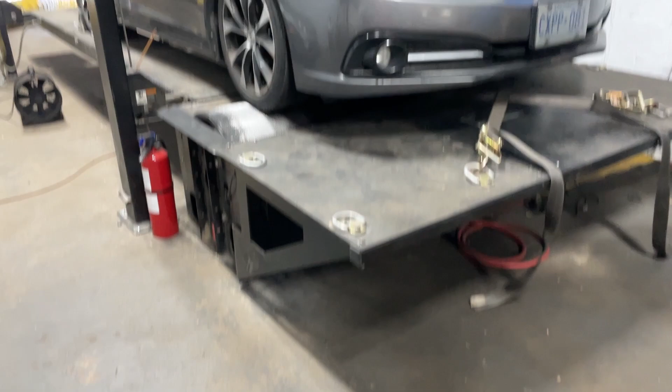Aiden brought his 2013 Civic Si in for a tune today. It made some great power. It actually has a very special engine setup and I'm excited to make a video and share it with you guys. So like I said, 2013 Civic Si, so this is a 9th gen Civic Si.

I see a lot of these cars and I really like these cars. This one is kind of a sleeper. It doesn't have anything too flashy. It looks pretty stock. It's lowered a bit. It has a pretty cool wing on the back. Carbon fiber by Kev. Never seen this one before. It's a really nice piece.

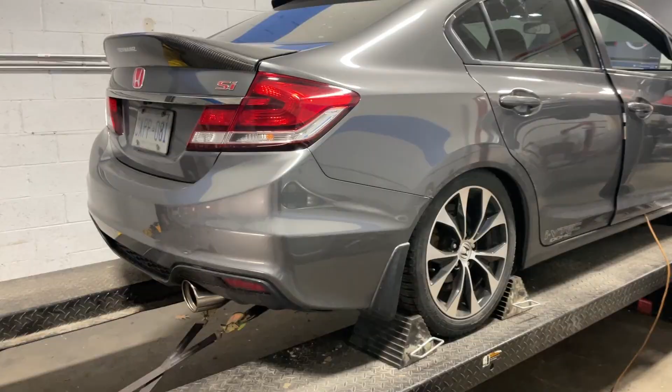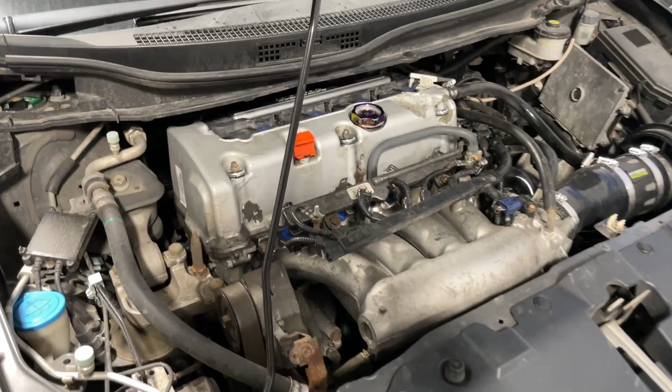Pretty stock looking Civic Si, but what's under the hood is pretty special. So why don't I show you what's under there? So this 9th gen has the engine that everyone wants. It is the original K24Z7 block, but the owner has swapped on a K20Z3 head. So this is the older style K20 head with 4 exhaust ports.

If you know these 9th gen engines, the K24Z7, it has one single exhaust port. It is an integrated exhaust manifold, so it just has a downpipe sticking right out the head. The head that's swapped onto this engine is the old style. It has 4 ports. It's running a conventional style header. It's running OEM 8th gen Civic Si cams, and this setup worked really well today.

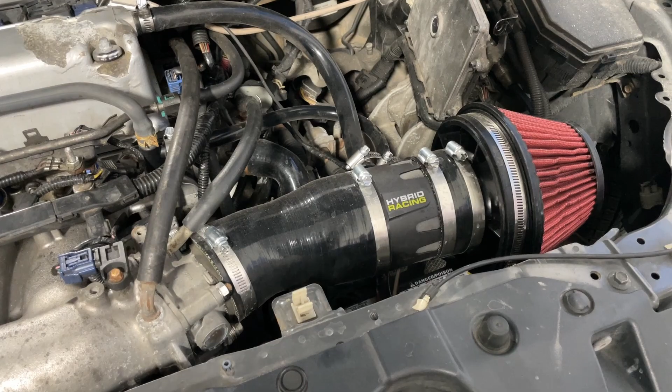Let me just go through the bolt-ons and we'll go into some more details of the engine, and then I'll cut to some shots of the dyno pulls. So, starting with the intake. This was a problem today. This is a 3.5-inch hybrid cold air intake, but it's not in its cold air configuration, and it's sucking in nothing but hot air today. Intake temps were up in the 150s in this configuration.

We ended up making some heat shields to do some testing, to fine-tune the setup. The owner is going to actually make his own heat shields that are more permanent, so he can run it like that and not see the ridiculous intake air temps that this was seeing, or he's going to convert it back to the proper cold air intake setup.

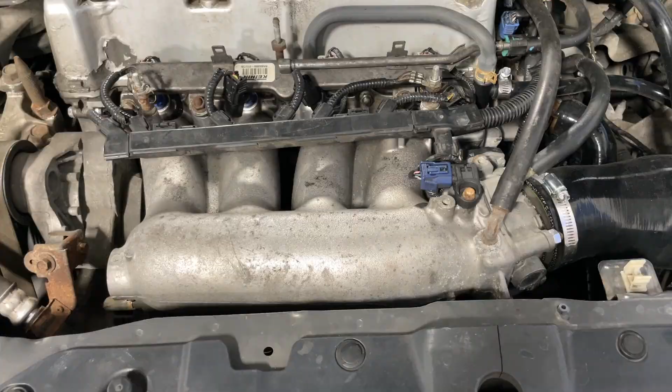It does have a stock 8th gen throttle body, so this is the 60 mil throttle body. It's running a stock unported RBC intake manifold. It's running RDX injectors. The head, like I said, K20Z3 8th gen Civic Si head with the 8th gen Civic Si cams. A mechanic did this for the owner. We believe it is running the 8th gen Civic Si cam gear, the 50-degree VTC cam gear. I'll try to confirm that and put it in the comments if we can figure it out.

The only other addition to this engine is the oil pump. It has been upgraded to the RSX Type S oil pump to help it rev out a little bit better and free up a little bit of extra horsepower. The header was a tough one apparently. It is running a PLM header that's meant for an 8th gen Civic Si with the K24 swap, but it still didn't fit. It hit the steering rack, so it had to be modified a bunch, banged, clearanced and whatnot.

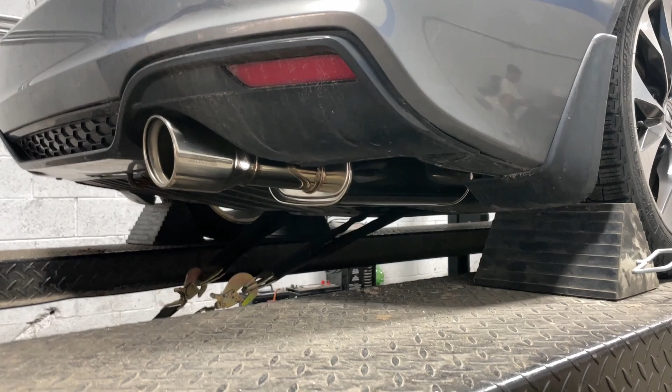Exhaust system, this is running the Invidia Q300. It is a very nice quiet exhaust by comparison to a lot of the other 3 inches. I think it's only 2 3/4 inch. So it is a limiting factor, but it didn't really limit it today. So that's pretty much it for the mods and the engine. The only other thing of note is we did tune it on pump 91 octane gas today. It is tuned on Hondata FlashPro. So I think we've covered everything there. Why don't we cut to some shots of the dyno pulls, and then I will share the final results for today.

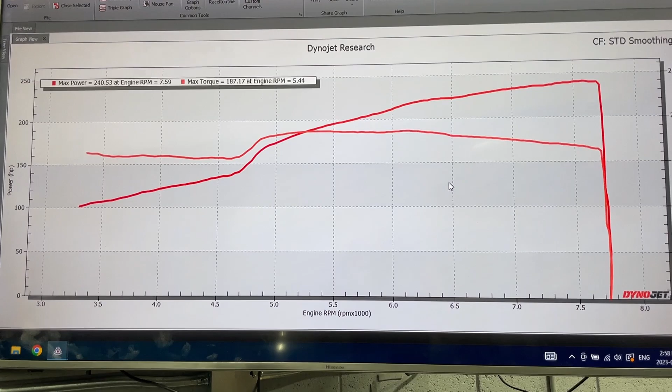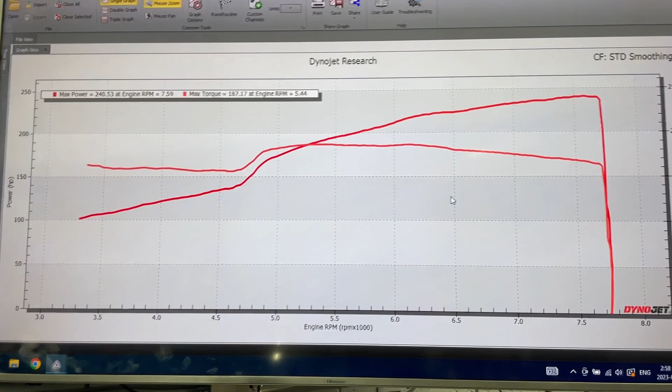All right guys, hopefully you enjoyed those dyno pulls, but I'm sure you really want to know what this thing made today. And up on the screen, I have the final results. Today, with pump 91 octane gas, it made 240 wheel horsepower, 187 foot-pounds of torque. And for a 9th gen, these are amazing results. Normally, a full bolt-on stock 9th gen engine will make around 210 wheel horsepower, plus or minus a bit, and about 175, 180 foot-pounds torque.

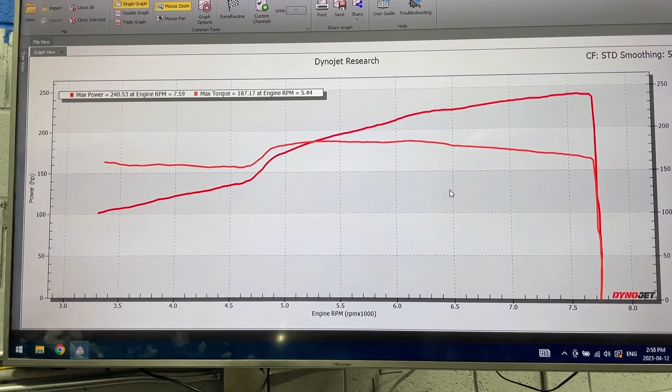But the 240 horsepower that this thing put down today is fantastic. We did raise the redline because it has a good oil pump in it. So its redline today is 7,800. It started to plateau there and we didn't need to really rev it any further than that because it wasn't making any more power. VTEC is set at 4,700.

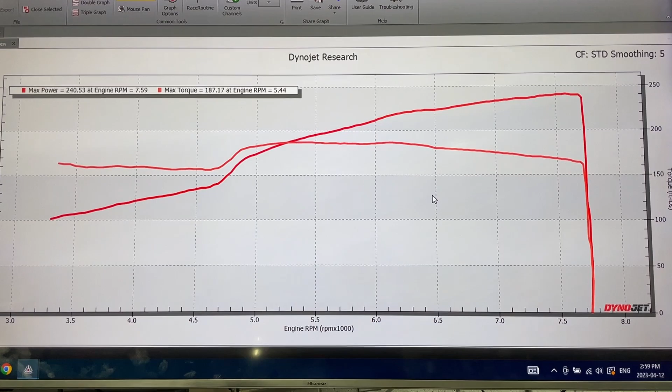I know you guys like to know what VTC is set at. So down low, it's 25 degrees. Through VTEC, it is 40 degrees, and then around 55, I start tapering it down to 25 degrees at redline. And that gave it the best results and kept the torque as flat as possible. This is a fantastic upgrade in my opinion for a 9th gen. If you want some serious power out of your 9th gen and you're willing to go to the trouble of doing a head swap, the 8th gen Civic Si, basically a stock Civic Si head, is a good upgrade.

It is a ton of work to put it in though. You can't just bolt it up. There are some passages that don't line up, so you have to weld those, fill them in with weld, then remachine this head flat. You do have to change over the cam position sensor wheels from the original K24Z7 head. But once you've done that and gone to all that work, you can expect some pretty good numbers. I know this owner is super happy with these results. I'm sure he's gonna really enjoy this setup. And I think he has some plans for possible other upgrades for this setup.

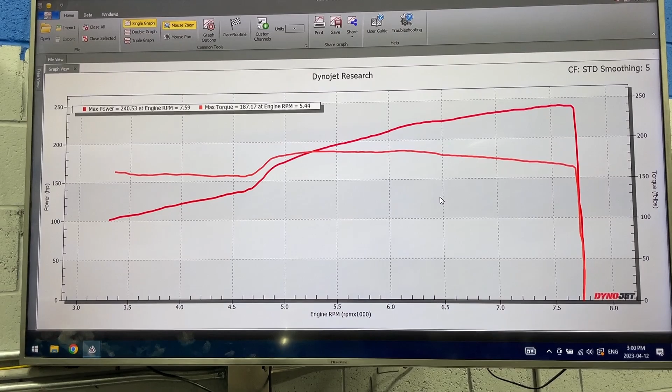So if I do see this car back again, I will definitely make another video and update you guys, but that's about it for this video.